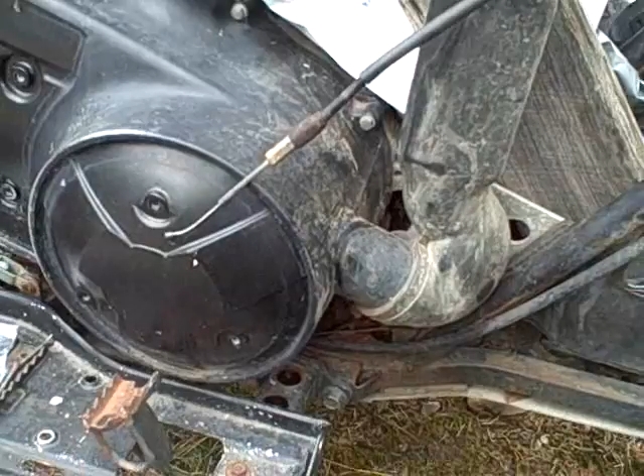Last time I worked on the Yamaha, I was going to drain the oil out and see what condition the oil was in, and when I got underneath there to drain it out, much to my surprise, I found that the oil plug was completely missing. The crankcase was empty. Whoever was tinkering with this thing before I got it to see whether or not it could be repaired apparently had pulled that out, and all those parts were missing.

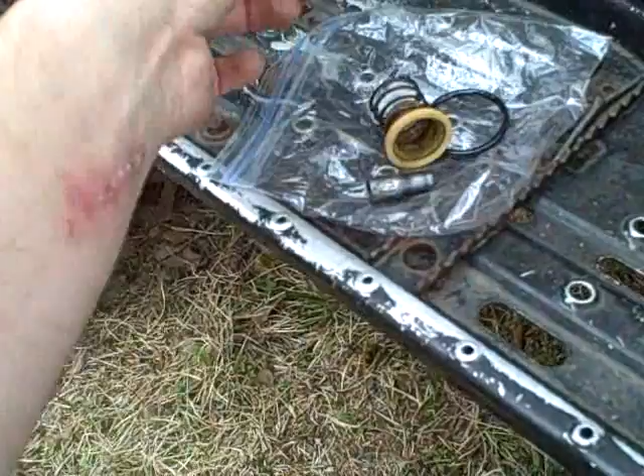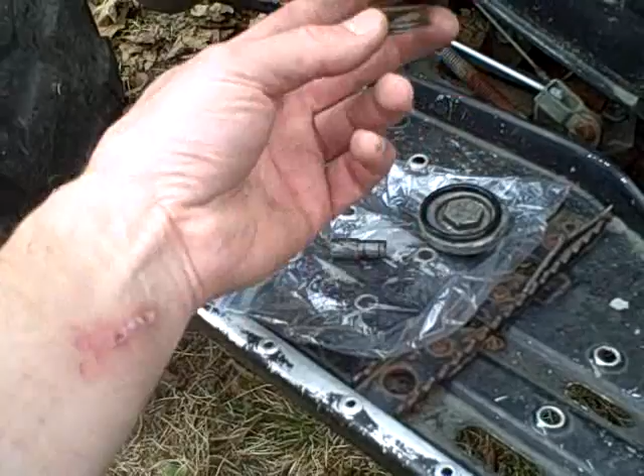I went online and checked prices on various parts, and what was missing was the oil plug itself, the O-ring, this little screen, this spring, and this little nipple-like thing here that was actually labeled as an oil pipe in the parts list. And when you take this plug off, the spring basically is going to come out with this. Why this was missing, I don't know, but it may have fallen out when they had it apart.

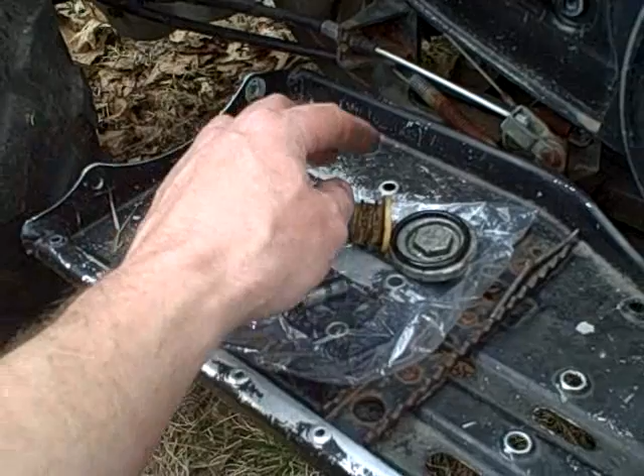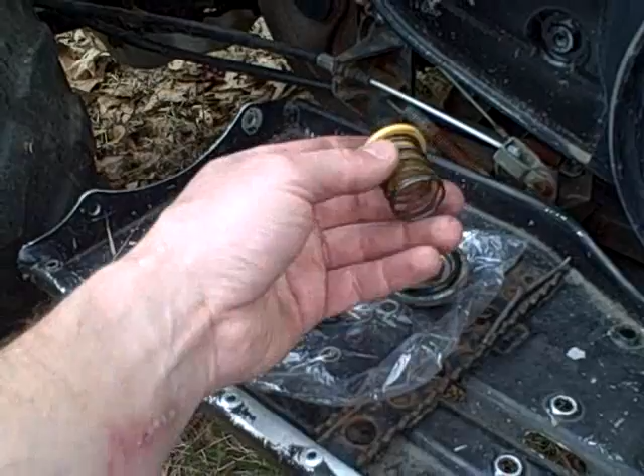So I found a guy on eBay. He was parting out a Yamaha Big Bear 350, I think, and I happened to check and notice that the part numbers on the parts breakdown were the same. So they both used the same screen and spring and plug. So he sold me the plug and the screen and the spring, and I actually paid him a couple bucks extra, and I asked him if he would throw in this nipple, which he did.

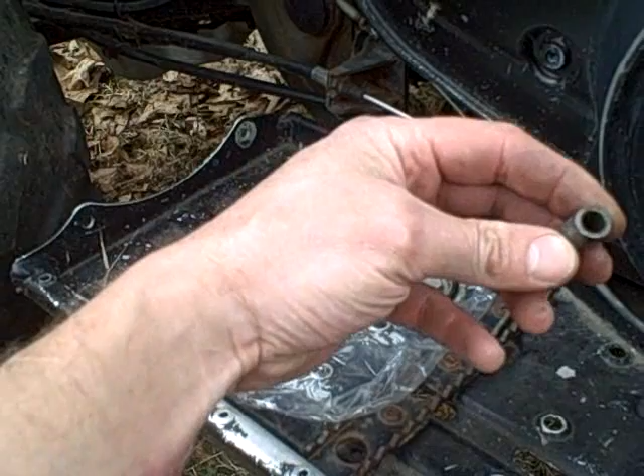He told me that he had a really hard time getting this out. He had to break the case in half, split the case to get it out, which I see why now. It looks to me like he had to grip onto this with some pliers or something and wrench it out of there. He really did a number on it, but I don't think that's going to be critical to the operation of this, as long as I can get it into the hole that it's supposed to go into in the bottom of the oil pump.

Not even quite sure what the purpose of this really is. I imagine it kind of sits down inside here, and well, anyways, so what I'm going to do is I'm going to install these parts, see if this is going to fit, and then install these other parts today, and then I'll be able to start reassembling my top end.

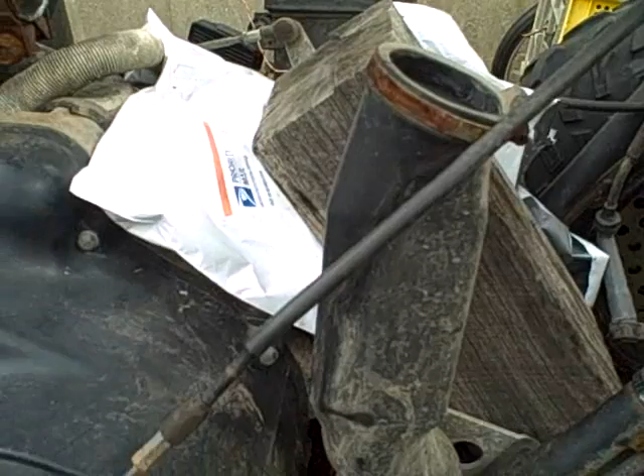Alright, parts from the Big Bear 350 were a perfect fit. So that little pipe just sticks up into the hole in the bottom of the oil pump, and then you place the little cup screen on top of the spring and put that whole assembly on top of your cap, and then raise the whole assembly with the O-ring into position, and then put the socket on it and push up as you turn gently to just kind of get it to thread. And once it starts threading, then you can put a ratchet on it and snug it up.

The O-ring that was on there was still in pretty decent shape. I'm just going to go with that O-ring for now, because if I get this running and actually see some hopes of this being a fruitful project, then shortly after I get it running, I'm going to drain the crankcase and refill again, only because I still have fears of some water contamination or whatnot that might still be in there. So I'm not going to run it very long with the oil I'm going to put in it after I put the top end together. And I'm also going to change out the filter, and I bought more than one filter, so I'm all set there.

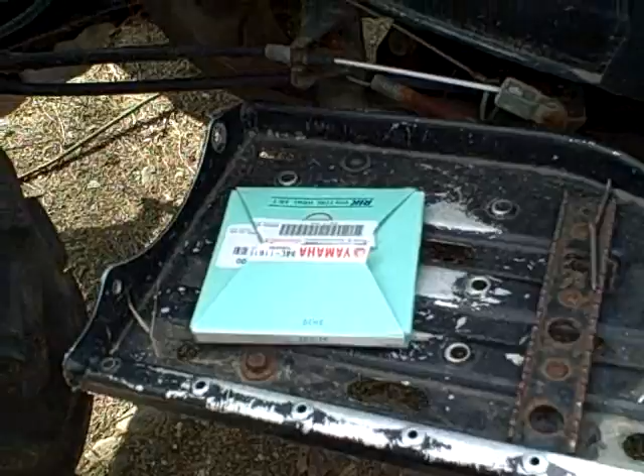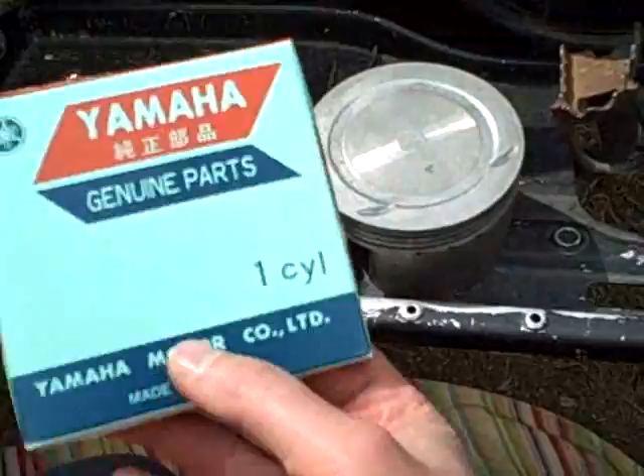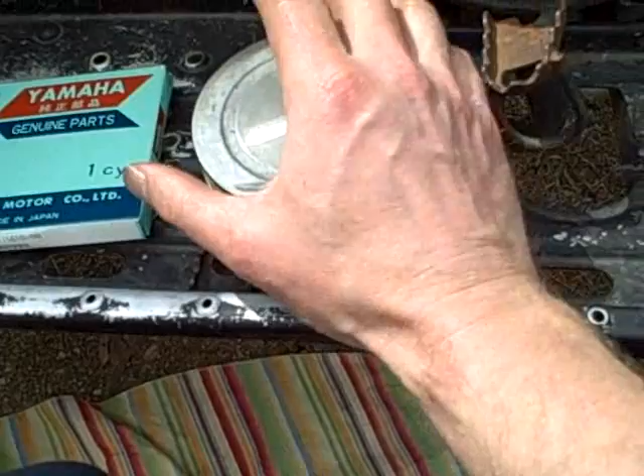Okay, first step I'm going to do is I'm going to take my cleaned up piston, and I'm going to install the new piston rings. Now, I didn't overbore this cylinder because as far as wear limits go, it had very little wear on it. The only concern on the cylinder was the light pitting from corrosion, and that was at the very top where the water had been sitting on top of the piston, between the top ring and the top of the piston, in that gap there.

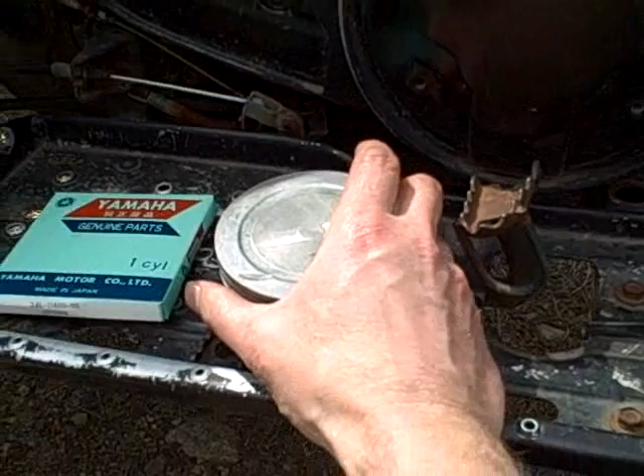The machinist I had work on it honed it for me, and he said, well, worst case scenario is it's going to smoke, and if it smokes, then I know at some point I'll have to get it bored over and get a new piston and rings oversize. But I didn't want to sink that much money into it until I know whether or not everything else on this thing is salvageable.

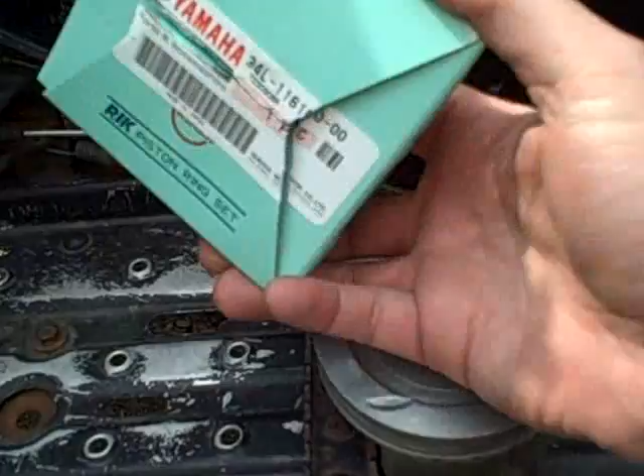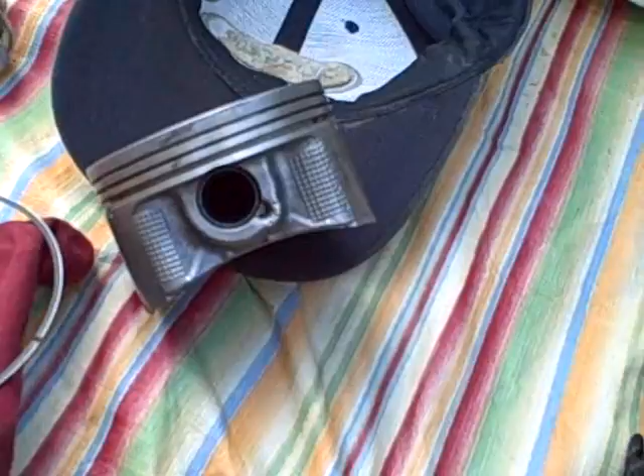So what we're going to do is we're going to put just a new set of rings in, which these rings were dirt cheap. I found these on eBay, probably new old stock, judging from the price on them. Cheap, genuine Yamaha piston rings. So I'm going to install the rings on the piston. Alright, just a note, when you're installing this oil control ring, which is a 3-piece assembly, it's got 2 very thin rings, and then this is sandwiched between them.

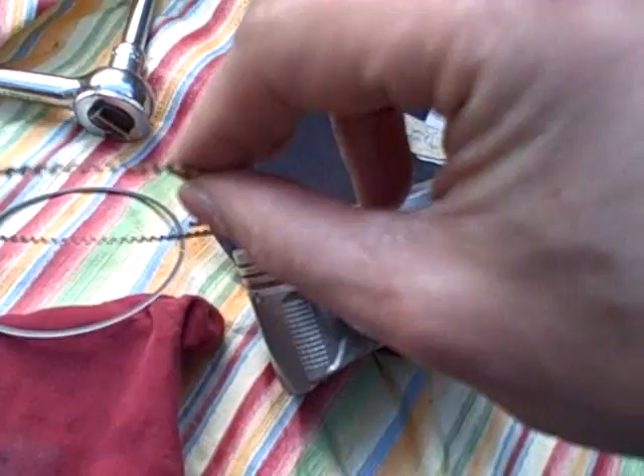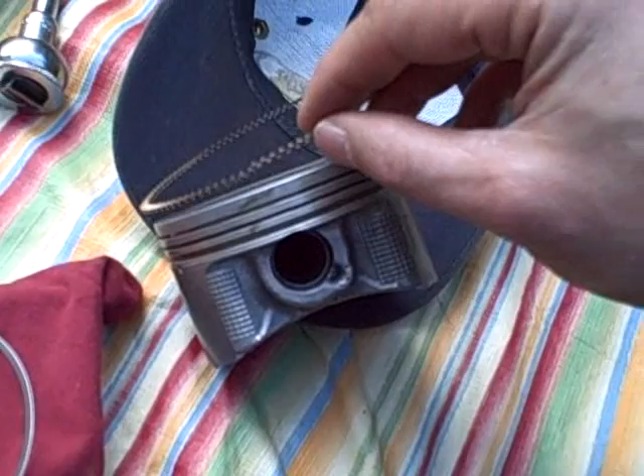You don't want to put one of these on first and then try and get this in, because on this middle assembly there's actually tiny ridges, and they actually are supposed to be behind this ring here. So if you put this ring on first, you're not going to be able to get this in correctly. So what you want to do is you want to install this first, and then this, and of course this goes in the widest groove.

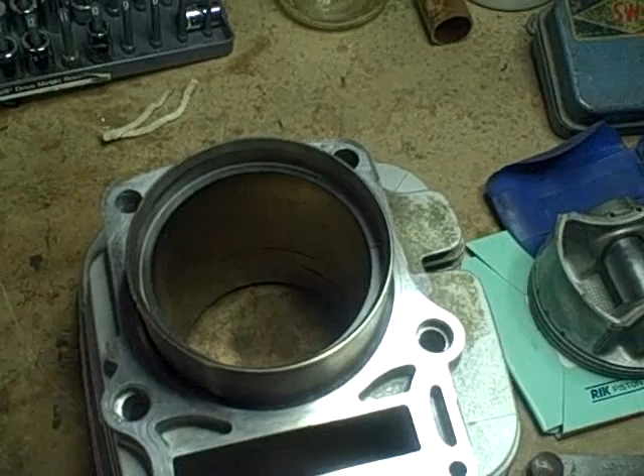Before the new piston rings can be installed, you need to do a couple of things. One of the things that needs to be done is you need to check the end gap on the piston ring. And the end gap is basically when the piston ring is in the cylinder, it's this gap where the 2 ends of the ring end.

And the reason why you need to check the end gap is because if the end gap is too small, what can happen is as the rings heat up and the motor's running, they can actually start to push against each other and cause the ring to hang up, and that can actually cause a number of problems and could scuff the cylinder wall and cause some damage. So that's why it's important to check the end gap.

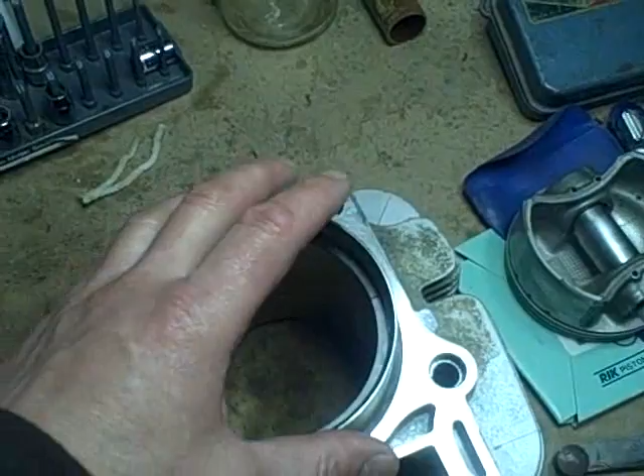So you've got to check the end gap for the 2 compression rings, which are the 2 topmost rings on the piston. So I've inserted one of the rings, and what you want to do is you want to check the end gap at the top of the cylinder and the bottom of the cylinder, because when the cylinder wears, it tends to wear unevenly. You tend to have a wider dimension at the top here than you do at the bottom, so you want to check it in both places.

So you've got to insert the ring into the cylinder, and then what you want to do is, I'm using just a depth gauge off of my calipers, and I just ride that around the top, and I push up with my finger underneath to make sure that I've basically got the ring all the way around at the same depth, so that way I know the ring's not cocked in the cylinder either way. So that's going to give me an accurate measurement.

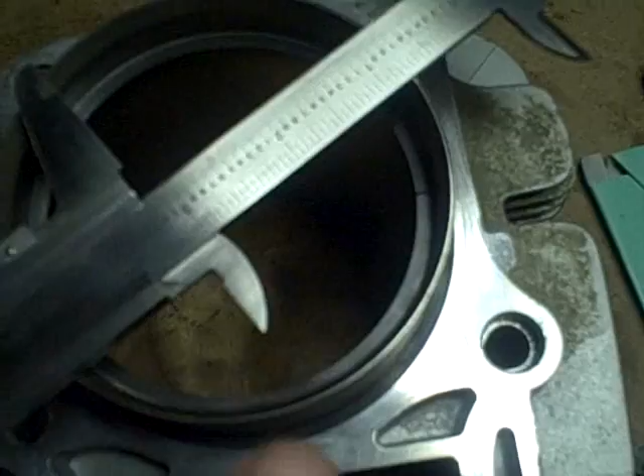Once I've done that, I then take my feeler gauges and I actually check the gap right here. So I'm going to do that now. Okay, I just measured the ring end gap. 19 thousandths was a go, 20 thousandths was a no-go, so 19 thousandths is my number. And then I measure the bore to see how many inches it is, and the bore is 3.75 inches.

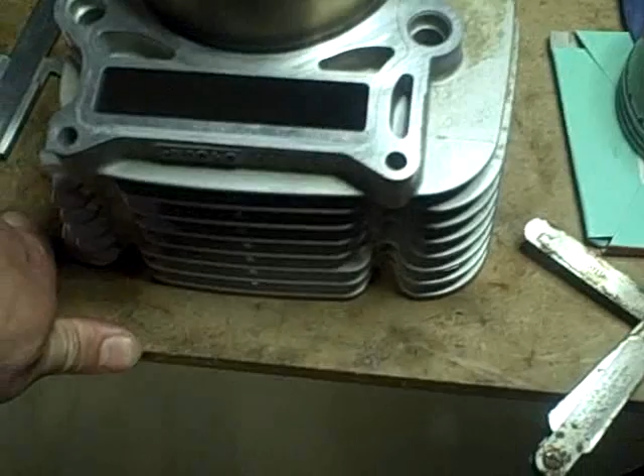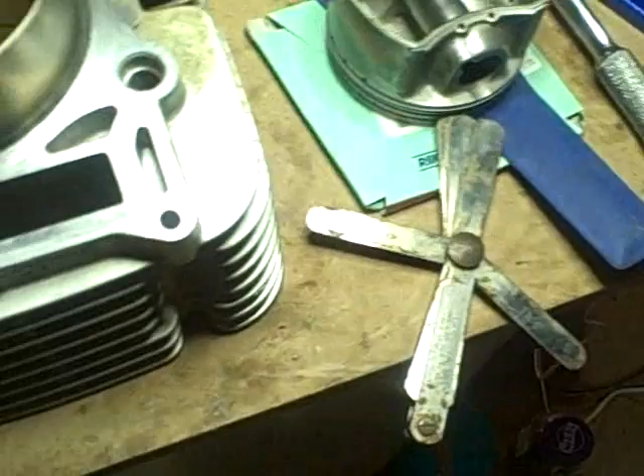So you multiply 3.75 by 0.004, and that's your minimum number. Alright, had to whip out the old calculator on the phone, but 3.75 times 4 thousandths is 15 thousandths. So minimum end gap needs to be 15 thousandths, and right now I'm getting 19 thousandths. So my end gap is good at this position. So now I'm going to just repeat the process from the bottom side of the cylinder.

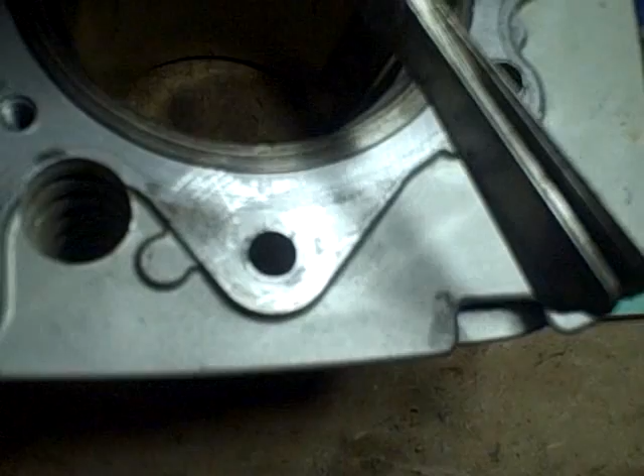Okay, now I've turned the cylinder over, the top facing up. Again, I've used my depth gauge on the caliper to make sure the ring is parallel distance from the top surface of the cylinder. And I'm going to check my end gap. Okay, and actually it's moved a little bit, but it looks like 19 thousandths is a no-go.

So the end gap is actually smaller on the top here, and that's interesting because, let's see, for the end gap to be smaller, it means that the ring must be compressed a little more this way, which would indicate that the bore at the top here is actually a little bit smaller, the opposite of what I would have expected for a wear pattern.

Okay, the end gap here, I just checked it, and it's a little tight, but the 17 thousandths gauge does go in, so it's probably about just a hair under 17 thousandths, which is over the minimum of 15 thousandths, so we're good to go. Now I'm going to repeat this entire process for the other compression ring.

Okay, here's the other compression ring. Now on this compression ring, 15 thousandths is the size of the end gap, which is the minimum. So lucked out there. Not going to bother checking it from the other side because I know from the last measurement that the bore is tighter at the top here than it is at the bottom. So if it passes here, it's definitely going to pass at the bottom.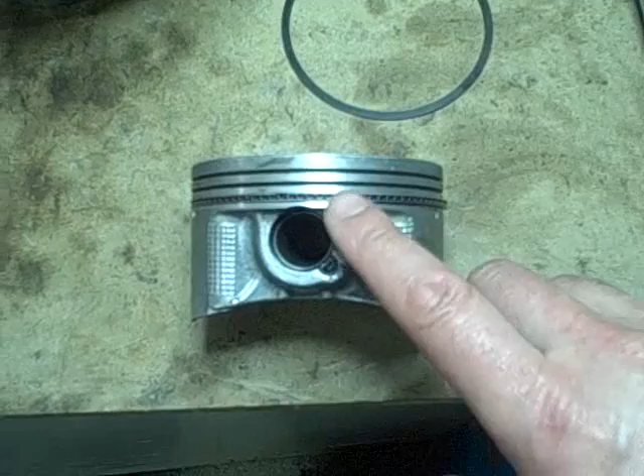Okay, now I can install the rings on the piston. The oil control ring, the lowest ring, it's pretty easy. Pretty much I just went over this in the video before when I had all the rings on there. I then took the rings off because I realized that I wanted to check the end gap on the rings, and also I wanted to verify the correct order of the rings.

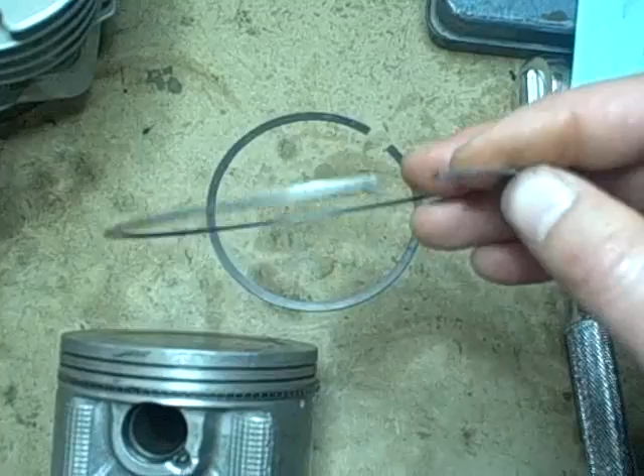Now I have the service manual, but the service manual, when it talks about installing the rings, it doesn't differentiate which ring is which. I think probably when the manual was written, the replacement rings were maybe just regular iron rings, or maybe they just figure that you would rely on the information that usually comes with the replacement rings. The reason why I say all this is because this ring has a chrome layer on it by the looks of it, and you can actually see it at an angle much better, and this is a regular iron ring.

So oftentimes you want to refer to the paperwork that comes with the rings. This is how these genuine Yamaha rings came packaged. There's no paperwork in it, and there's nothing to indicate which way to install the rings. However, all of the rings that I've seen out there that have one chrome ring or coated ring, it's almost always going to be the top compression ring. And so we're going to put the chrome ring in the top groove, and we're going to put the regular iron ring in the next groove.

Then the next thing that's common to most rings is the fact that if the rings have a bevel, which if you look at the cross section of this ring, it's completely rectangular. So there's no bevel on this ring. If it were to have a bevel, generally speaking, on most installations, the bevel faces up. That being said, if the ring has no markings and no bevel, typically it can go either way. If the ring has any markings on it, typically the markings face up.

This ring, the only markings I can find is a small tiny R. So we're going to put this ring in the second groove down with the R facing up. The chrome ring has no markings whatsoever on either side. It also has no bevel, which would indicate that it could probably go either way just perfectly. So we're going to put it into the top groove. Alright, I've got the rings installed.

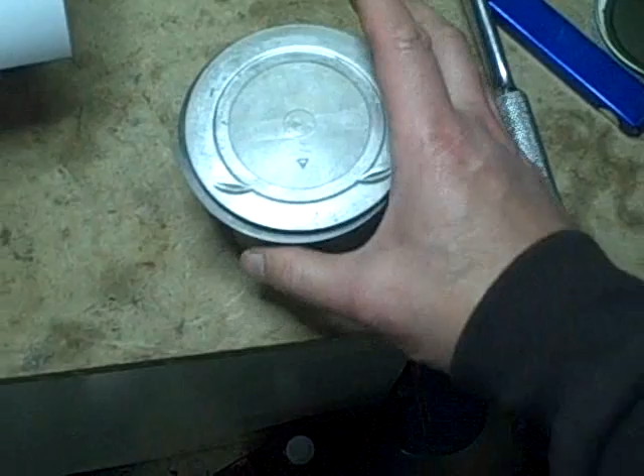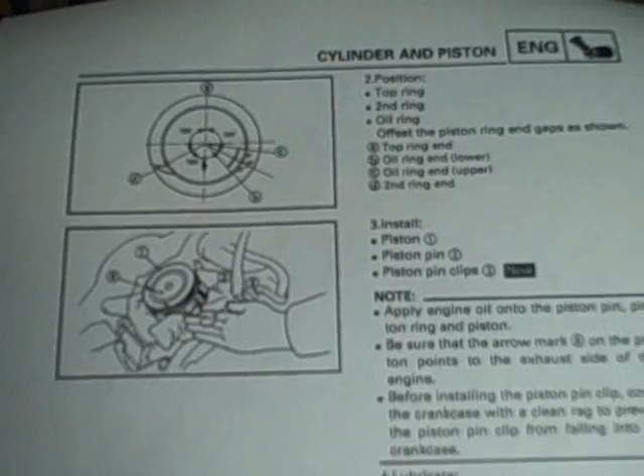Now the last thing I want to do before I finish with the piston assembly is I want to orient the rings. And what I mean by that is you've got the end gap there on all of the rings, and you want to make sure that they're in proper position. So the service manual actually gives you a guide. Oftentimes you can go on to many of the manufacturer websites if you're using aftermarket rings, and they'll often tell you exactly how to orient the rings, or the paperwork that might come with the rings might also talk about how to orient the rings.

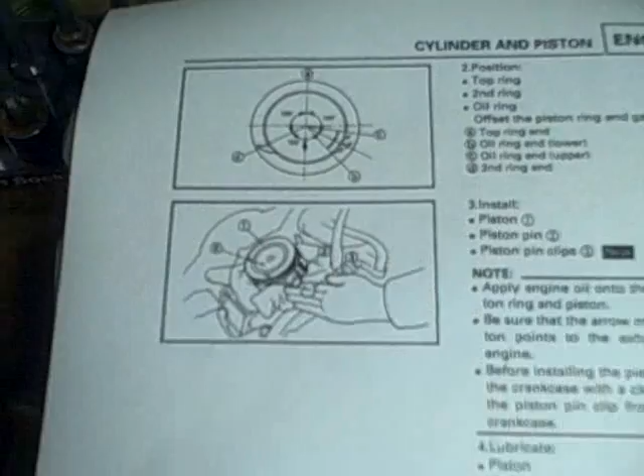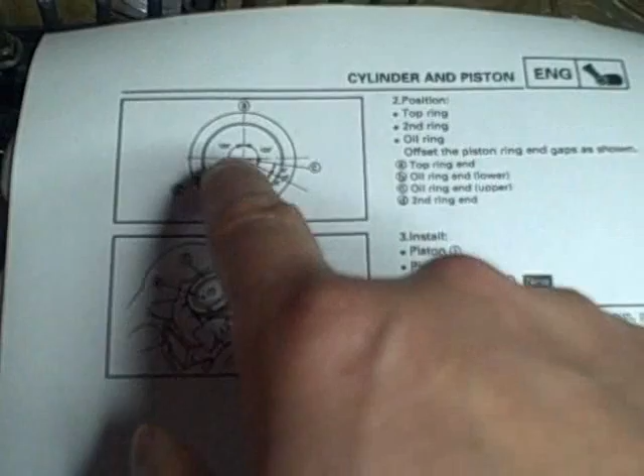But basically we've got a little diagram right here, and it shows you looking down from the top of the piston. We've got the arrow facing forward, which we've got that arrow right there, and they're telling you that A, which is the top ring end, is pretty much at 12 o'clock. B, the oil ring end for the lower oil control ring, is going to be at about 4 o'clock.

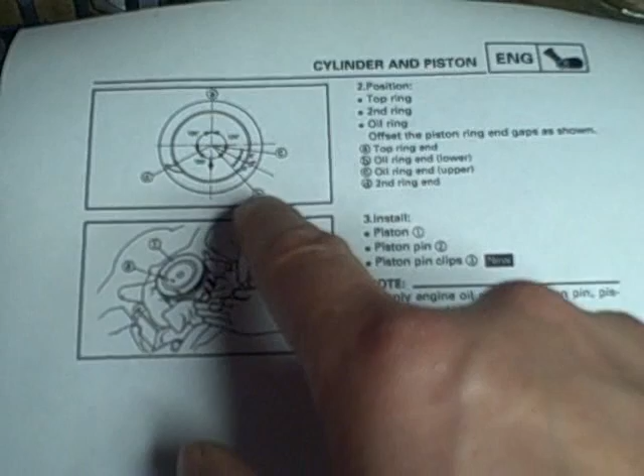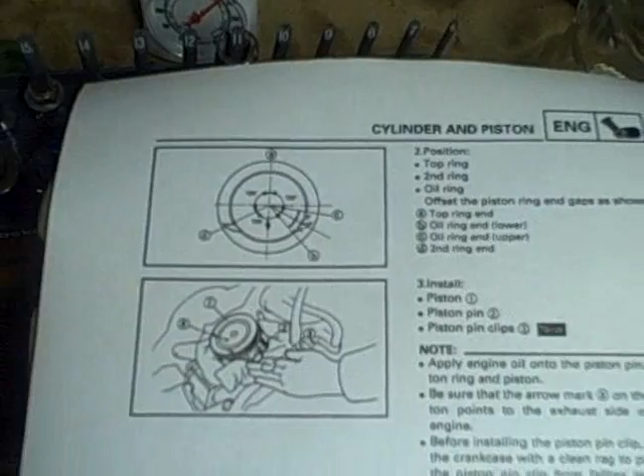C, which is the oil ring upper, is going to be at about a little past 3 o'clock. And then D, which is your second ring, your second compression ring, is going to be at about 8 o'clock. So I'm going to orient those now. I've got my rings oriented.

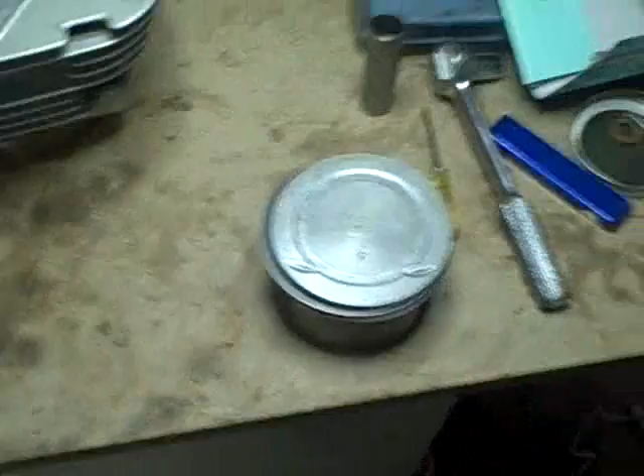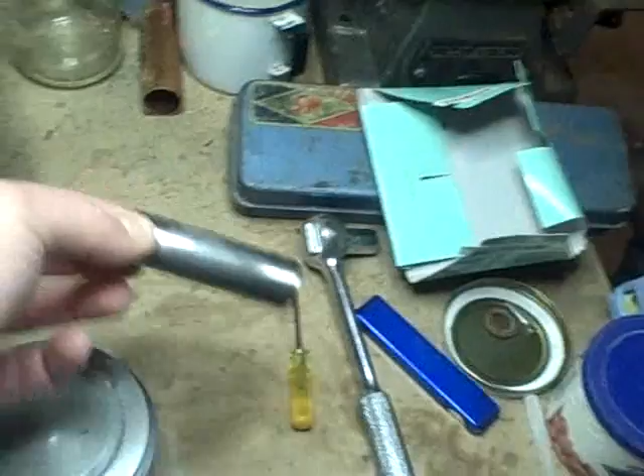Now the next step for reassembly, according to the service manual, is to actually put the piston on the top of the connecting rod, put your wrist pin in, put your retaining clip in, and then you're supposed to, while lowering the cylinder into position, compress the rings with your fingers from the underside and insert the piston into the bottom, and then lower the whole assembly down onto the top of the crankcase. Now, I'm not saying that's not possible.

I mean, I'm sure people do it all the time maybe, but the reality is, working alone without an extra pair of hands, not doing this all the time, I think that's going to be kind of tricky. So I want to try something a little different. My idea is going to be to flip the cylinder over,

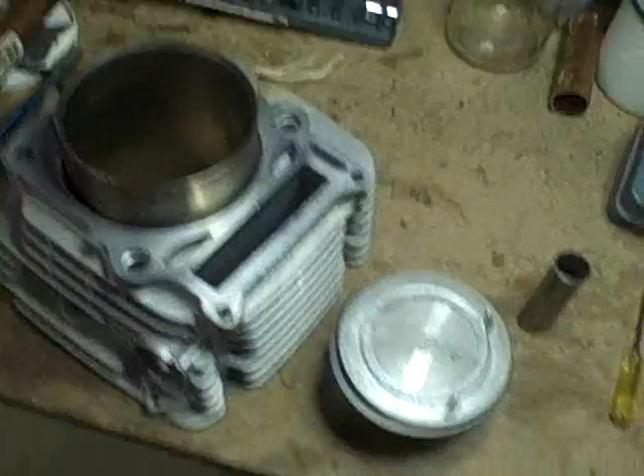and what I'm going to do is I'm going to use my piston ring compressor, and I'm going to compress the rings, and I'm going to insert the piston upside down into the upside down cylinder jug, and then slide my ring compression tool out so that the piston is now stuck into the bottom of the jug, but still sticking out enough to expose the hole that the wrist pin goes into.

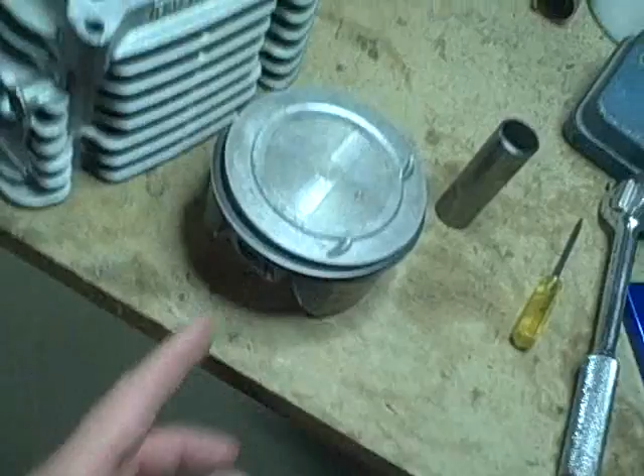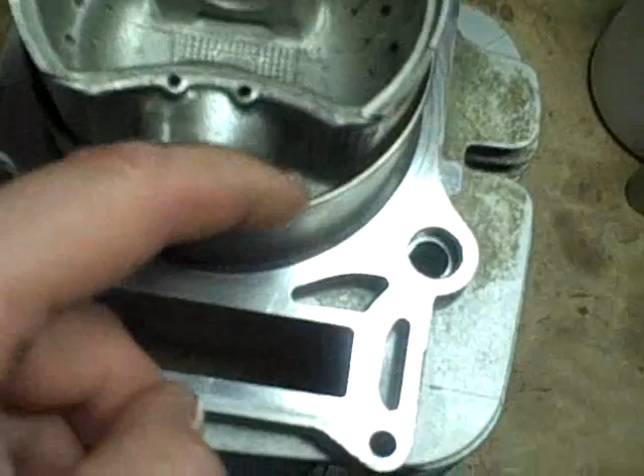And then I'm going to try and invert the whole assembly and insert the wrist pin once the connecting rod's in place, and see if I can't make that work. There is a beveled edge on the bottom of the cylinder here that I'm sure is there to ease in the installation of the piston rings if you're doing it with your hands.

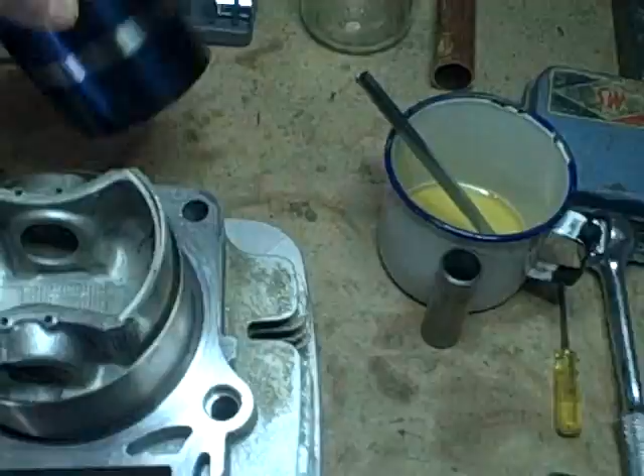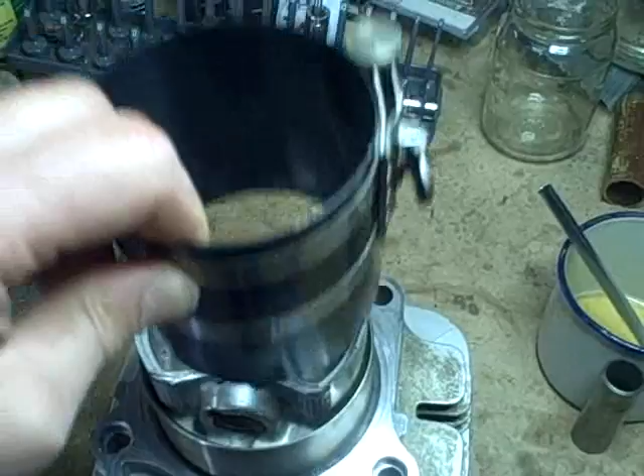So you could probably do what I just did if you want to try this method with your hands compressing the rings. But I've got a piston ring compressor that I've bought for other projects, and it works perfectly fine, so I decided to use that. The way this works is this sleeve doesn't actually go down the cylinder. What it does is it sits, you put it around the piston and compress the rings down, and then you just kind of sit it on top, and then you gently, you pre-lubricate this.

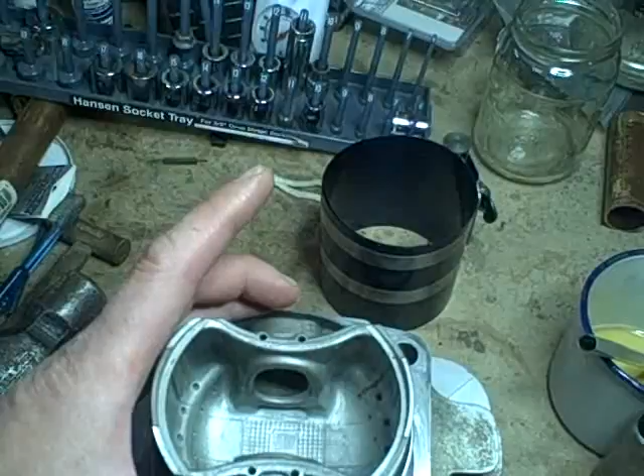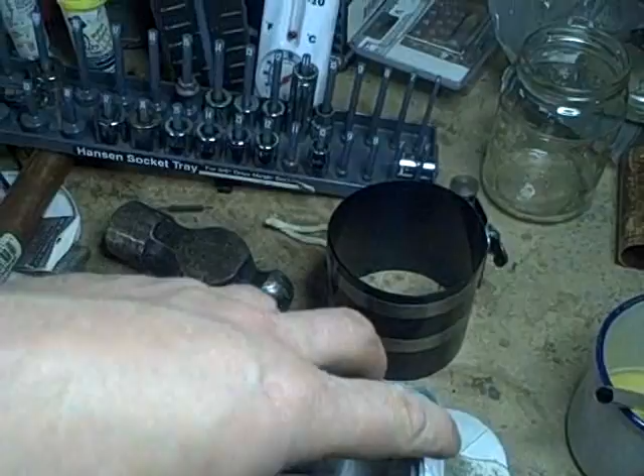Also, this is a good time to mention that I pre-lubricated the cylinder walls and the piston rings and the piston assembly with clean engine oil, which is what's prescribed in the service manual. And anyways, then once you have that sitting on top there with the compressor around it, you gently tap with a wooden mallet, or I use the butt end of this handle on my ball peen, gently tap it down, and it'll pop into the cylinder. And so it's in now.

I also made sure that the arrow on top of the piston is pointing towards what would be the front of the motor, or the exhaust side of the engine, which is this way. So right now I've got it in. I actually popped it in a little too far. I've got to back it back out so that I'll be able to get my wrist pin in place.

Alright, so now here's where I want it. I've got enough clearance now that I'll be able to slide the wrist pin into place, but the rings are still inserted far enough that they're staying in proper position.

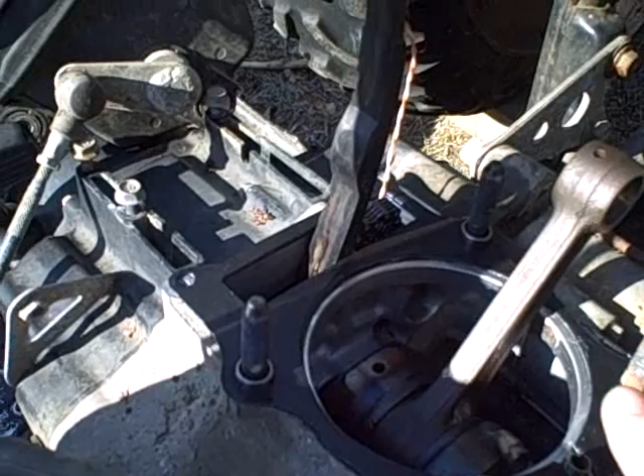Okay, I've now removed the old cylinder base gasket. I've installed the new base gasket. I've put a light coat of RTV sealant on the base gasket. I'm going to make sure I put some oil on the top of the connecting rod journal, and then I'm going to get ready to install that whole assembly. And then you got to lower it down. You're going to make sure you don't damage this guide for the timing chain.

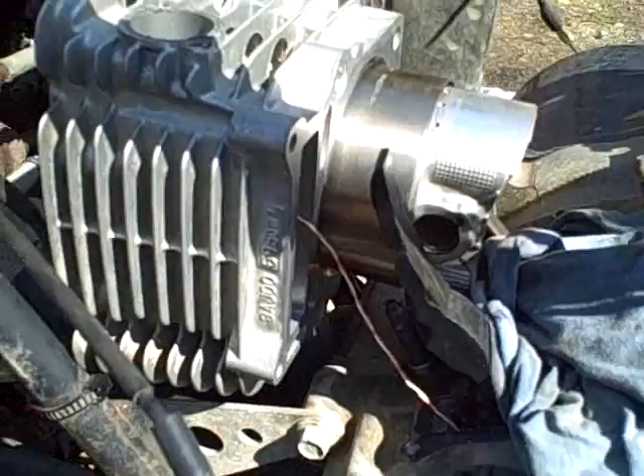And then also I'm going to pass my little wire here through. That's going to help me fish the timing chain back up through the cylinder and make sure it doesn't fall back down into the crankcase. So you get a lot going on here in a short amount of time. And then also it's a good idea to stuff a rag down inside here around the base of the connecting rod as you're installing the wrist pin clip, because if the clip falls down inside the crankcase, you're going to have a real headache.

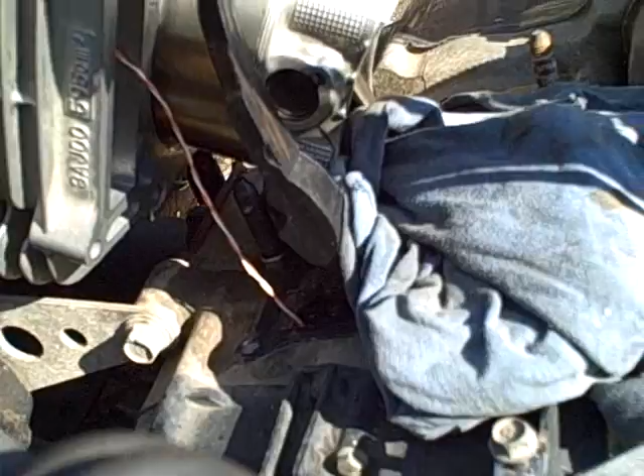Alright, so now I have the whole assembly put together, and I've got it tilted over, and this works out great, so that kind of holds it in place for me while I snap the ring in. I've got the ring snapped in, I lubed everything up with oil, and now I'm going to just put a liberal coat of oil on the part of the piston skirt that's still exposed, and I'm going to make sure this guide goes into here as I turn it, and I'm going to lower it into position. Now it's installed, and now I can start installing the nuts and bolts.

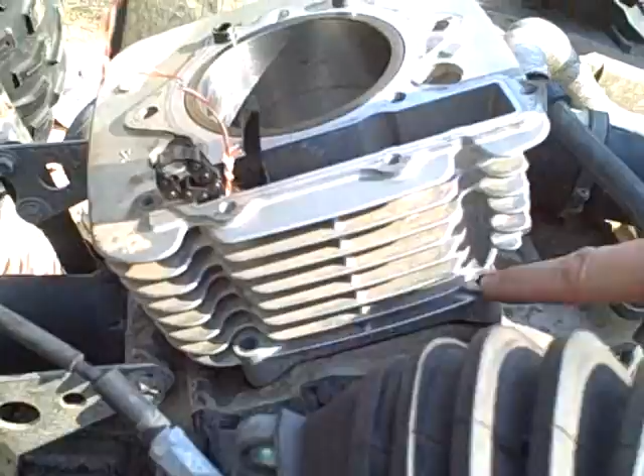Okay, now I'm going to torque down the nuts that hold down this base. They're almost like a cap nut. And the specs for that is the nuts are supposed to be 30 foot-pounds, and the bolts, 6mm bolts, which are these two little ones here, are 7.2 foot-pounds.